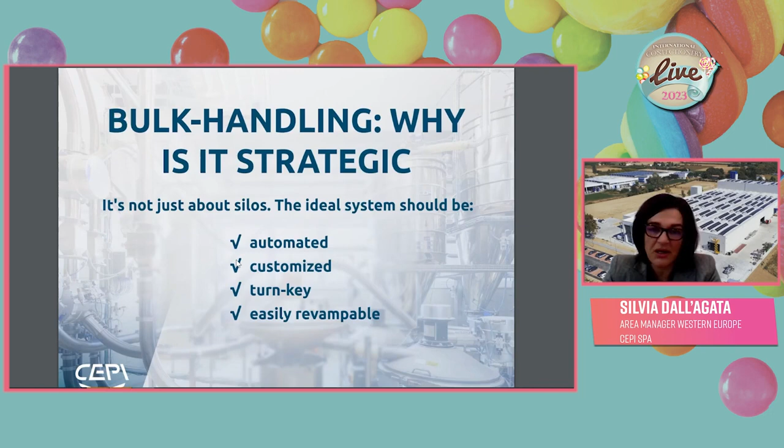The idea is to provide a turnkey system, which is a complete system allowing the user to be independent, cover the whole process in the company, and have all the data of its operation available, recorded, and maybe also have the possibility to share it with an external ERP.

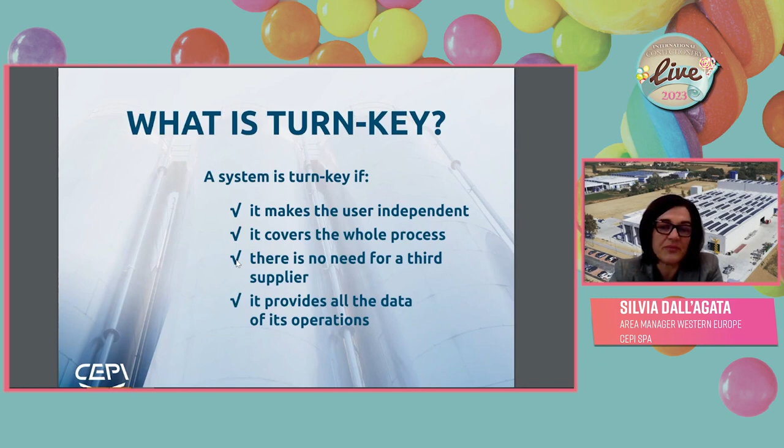So we need to focus on the silo system, on the bulk handling system, as an organic view. This system will touch all departments in the company, starting from warehouse, production, technical department, purchase, and marketing as well.

When we design a system, we always have to keep in mind our goal, which is optimization, waste reduction, increase in the production facilities, and have sustainability goals in mind as well.

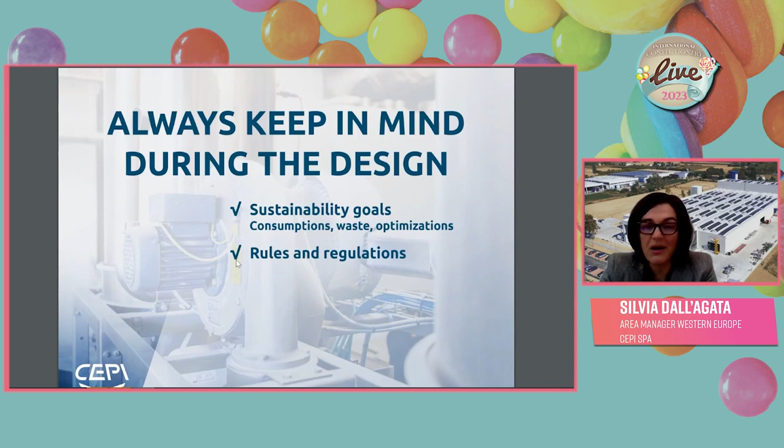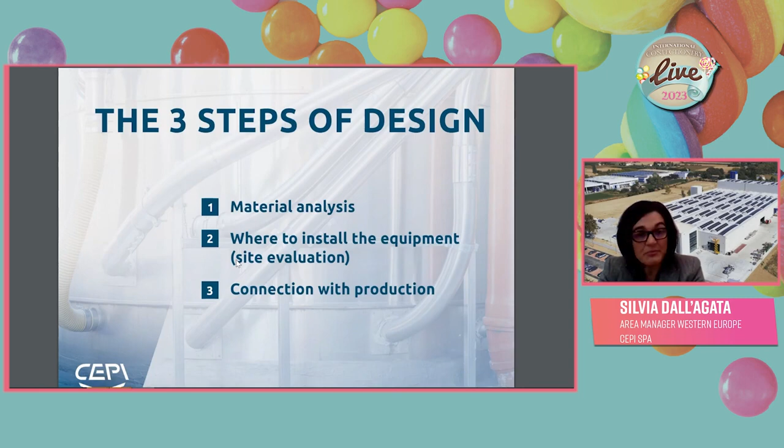During the design and installation of the bulk handling system, we have three main steps. The first step is the analysis of the materials.

So we need to check and analyze and define which kind of ingredient we are going to include in this project, check all the technological characteristics of this ingredient, prove the capability to receive this ingredient and in which way, and realize and install a system which allows the best flow inside the production from warehouse up to the process.

The important part of analyzing the raw material is to check the best way to store it, how to reduce the cost of purchasing this ingredient, and how to store it in the best way, considering the environmental factors, the temperature, and the humidity level we have to ensure for this ingredient. So the first analysis of the material involves purchase, technologist, process, and the production area.

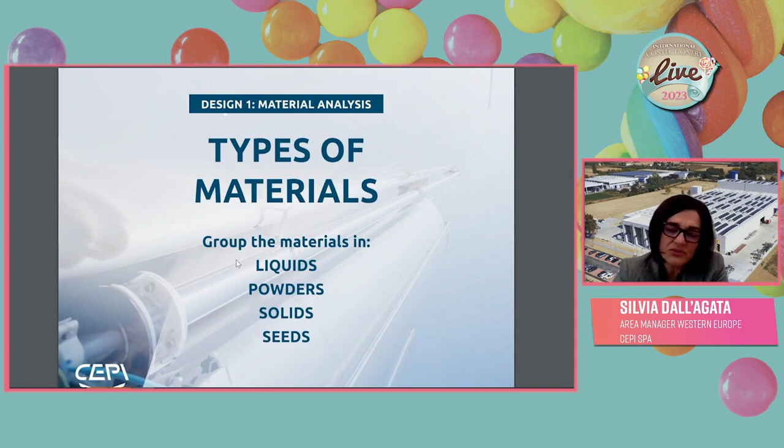There are many types of ingredients we can handle. You can handle with a bulk handling system liquid or powder ingredients. I will not go too much in detail about that because it's something well known in the food application and for experts of the process, but we can handle all types of ingredient and receiving methods.

After checking the raw materials we would like to store and dose, we have to consider which are the most critical ones, find the solution, and apply this solution to the real design of the installation.

Here we have step 2, where we check and discuss with production where to install the equipment, how to connect the equipment, and how to interface with other equipment in the factory. In this case, it's really important to have knowledge about the building, the layout, and to put the equipment in the best way in order to have the lowest possible power consumption in running the system and the best flow to reduce the handling inside the factory.

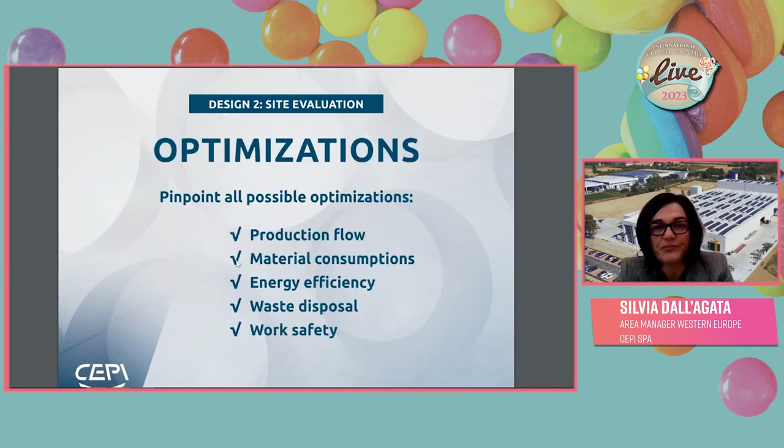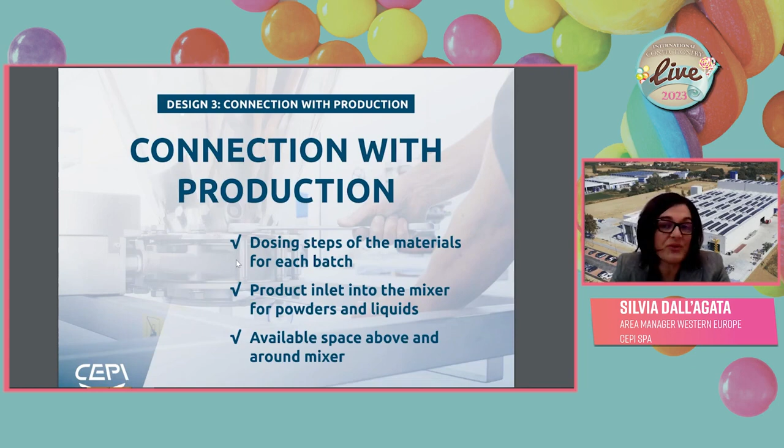After having decided the best place to position the equipment, we can now concentrate on the connection with the production process. In this case, it's really important to understand which kind of product the customer is going to produce, and how to interface with other parts of the installation, after the dosing and then later in the production area.

In this part, it's really important to have an efficient automation system. The automation is a crucial point in a bulk handling system because it allows you to have a complete bespoke solution based on the requirements of the factory.

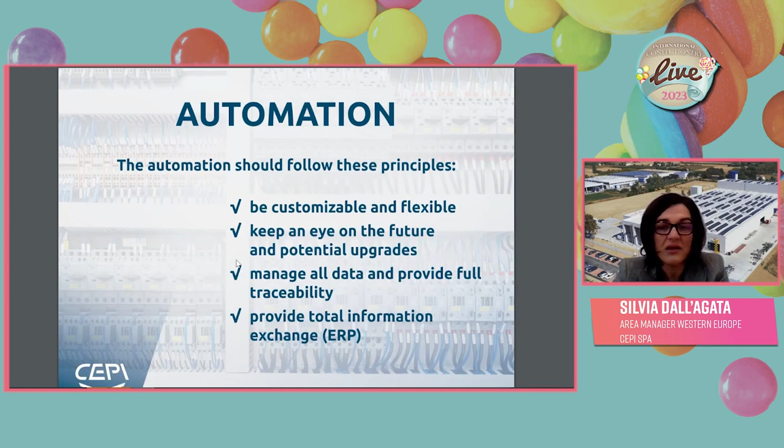It can be designed to have the possibility to upgrade the system, extend the system in the future. A really important aspect nowadays is to manage all the data provided for full traceability of all the ingredients and the steps in the production. This data can be sent to an external system, an ERP system in the company, and can be interfaced with other systems to analyze all the production.

The designing of the system has to have in mind a long life for the system, and we have to think about long-term operation. The system has to be flexible, has to be easy to extend and expand, with an optimized design and automation based on the specific requirement.

So now we come to the key aspects and the advantages of having a bulk handling system, what I mentioned before. So the payback, the quality, and the circularity.

The payback of the system is really in a short time and quite significant, because with the bulk handling system you can reduce the consumption of the powders and pollution in the factory. You can optimize the space in the production area and in the warehouse, and improve the working conditions inside the factory and the labor of the workers. So it's really quite an important point.

You can increase the production volumes, having this optimization and reducing the waste, and you can communicate with other software or ERP for complete traceability and control on the installation. With a clever design, you can easily adapt your system and extend it for future applications.

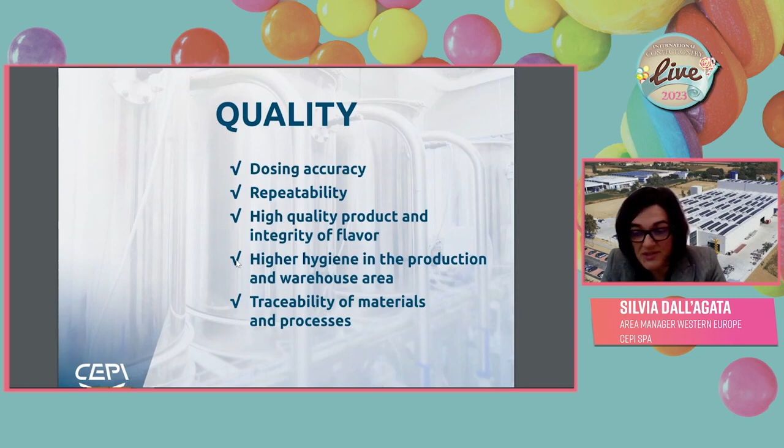In terms of circularity, today we hear a lot about circularity and sustainability, and bulk handling systems meet the requirements of circularity in terms of design thought to last for a very long time, to be expanded without huge modification, and thinking to optimize the design of the complete installation.